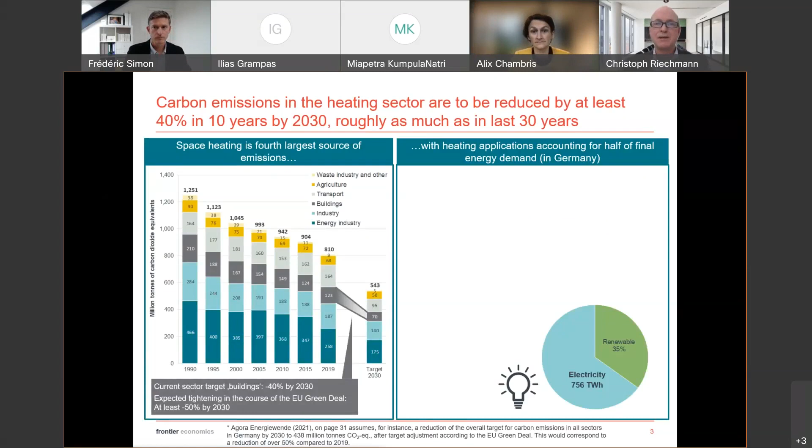An important point to note is that while we've made excellent progress, for example in the electricity sector, where about a third now stems from renewable sources, we also need to address the transport sector and particularly the heat sector. As Frédéric has pointed out, we need to advance quite significantly in the heat sector to achieve our renewables target also for heat.

In terms of energy consumption, out of the sectors we have in mind, the heat sector is the one really consuming the most energy of all. And it's one which does not have the same level of renewable penetration yet as we, for example, have in the electricity sector.

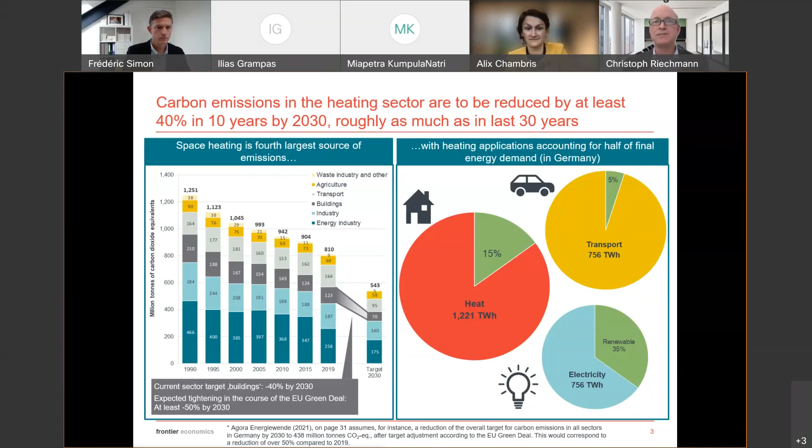The challenge we have in that sector is that we're dealing with a very heterogeneous housing stock, which means there's no one-size-fits-all technical solution to achieve this move to using more renewable energies.

Just to illustrate the setup we're dealing with: in a lot of cases, the housing stock is not new. It's not easily converted, for example, to apply electric heat pumps. The housing stock in Germany, for instance, is two-thirds made up of buildings constructed before the first energy efficiency regulation came into force in 1977.

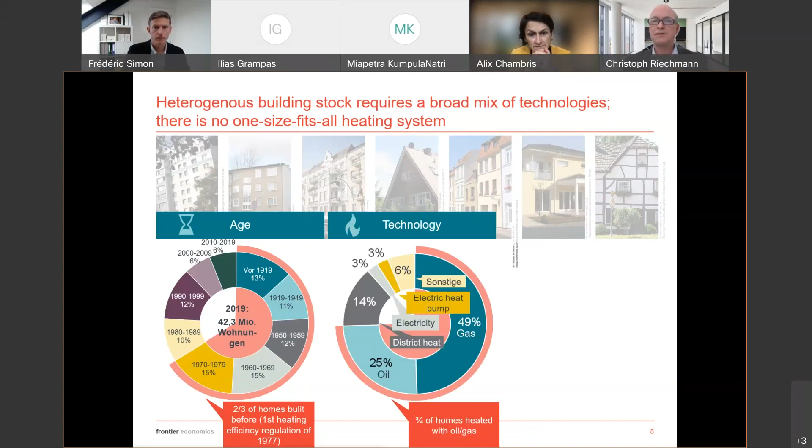Equally, in terms of technology, we have the huge challenge that currently three-quarters or more of the housing stock is heated with fossil fuels, mainly gas and oil.

And finally, the renovation status of these dwellings is also fairly limited. We'd say only about 1 in 8 of the dwellings are in an ideal state, for example, to be equipped with electric heat pumps. The remainder is only part renovated or not renovated at all.

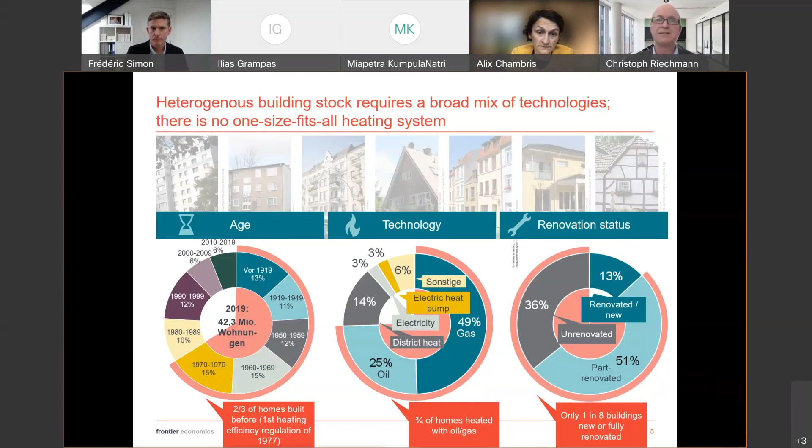What we need is a solution that fits for everyone, not just for new buildings with very high insulation standards. And the key challenge we need to address is to be able to meet peak winter demand. I'll try to illustrate what that means with a little quantitative analysis we've undertaken.

In the first instance, it's worthwhile looking at what the typical demand pattern in the heating sector is. We're estimating this based on the seasonal profile of gas consumption, which is a very good indicator of the seasonality of energy demand for heating. You see this very pronounced profile of peaks in the winter, and these peaks are directly related to the outside temperatures.

If we regroup this data in a slightly different way and relate the level of demand on the left-hand axis to temperatures, you see there's a very clear relationship between outside temperatures and the level of energy demand for heating, where demand is relatively low up to an outside temperature of about 18 degrees centigrade, and then rises very rapidly for colder temperatures.

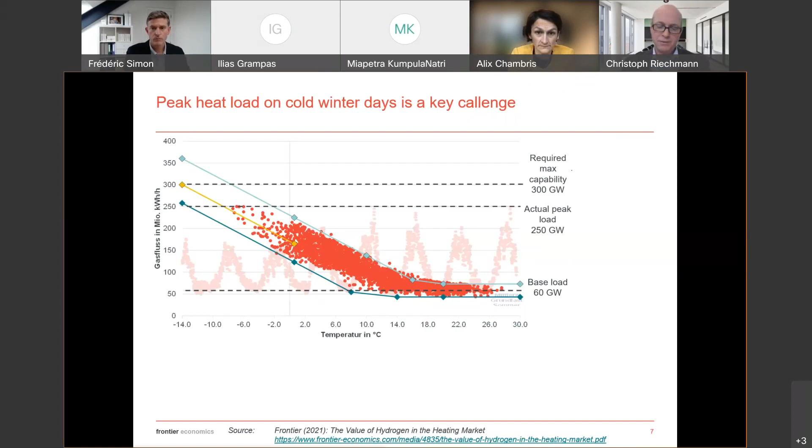It rises quite significantly, especially if we look at very cold days, indicated maybe by days with an outside temperature of minus 5 degrees. That means that in this instance for Germany, we need to be capable of supplying a peak winter demand for heating purposes of 230 gigawatts.

This is the demand we currently serve through gas alone. Add to that about 100 gigawatts of capacity currently served from oil heating. Together this adds up to 330 gigawatts.

If we were to convert all of this heating, for example, to renewable electricity using heat pumps, we would have an additional capacity requirement in terms of electricity of 86 to 124 gigawatts. Compare this to the existing scale of the electric system in Germany, which has a peak load of about 80 gigawatts.

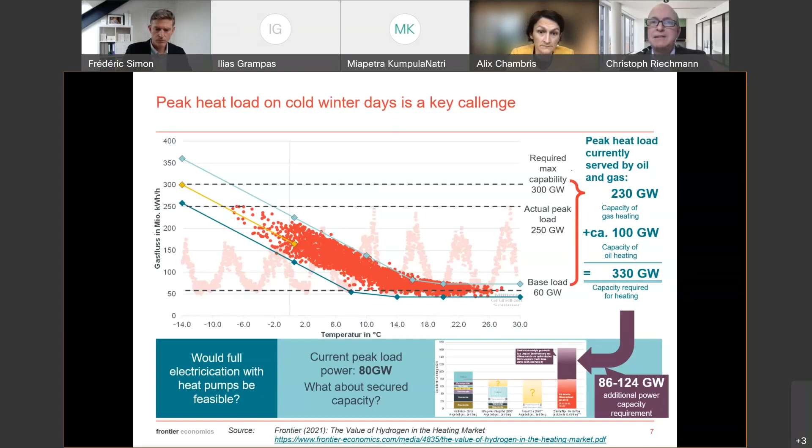So what we're saying is, to convert all of that peak winter demand to renewable electricity, we would need to more than double the electrical system in Germany, and we'd find similar values for other member states—and that in a situation where we're actually phasing out a lot of the conventional sources of electricity and gradually replacing them with renewables.

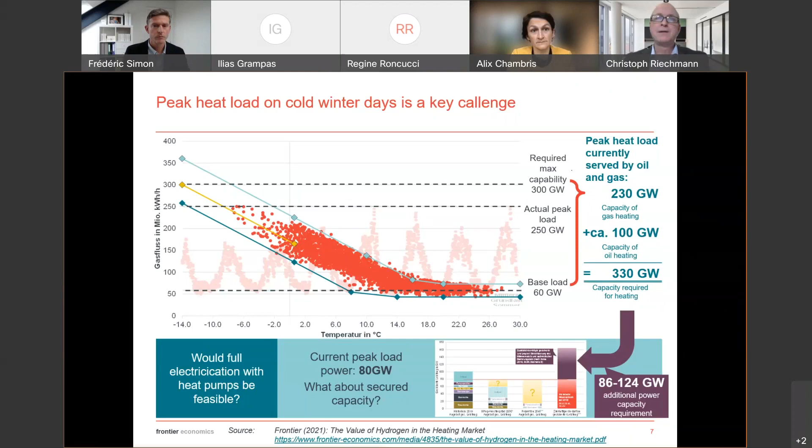So I think this alone gives us an indication and a picture of the challenges that we have ahead of us. Now, you will know that electric heat pumps are a sensible solution in order to relatively efficiently deal with energy demand, especially in winter.

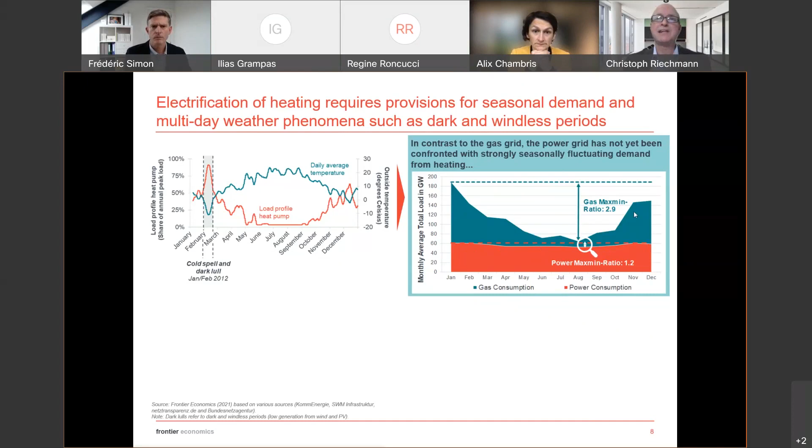And so if we contrast that with the current use of energy and electricity, which we've depicted here through the year with the red area, and add on top the heating demand that we would get on top of the traditional electricity demand, you immediately see the challenge that we significantly need to scale up our electric system to be able to meet all heat demand.

The challenge is that the electricity we propose to use, renewable electricity, does not actually meet this demand profile that we need to serve in the heat market.

Actually, the electricity supply profile from photovoltaics is somewhat inversely related. We produce a lot when we need relatively little for heating, and we produce almost nothing when the heating demand is greatest. And equally, wind, the other renewable electricity source, also does not ideally comply with the need for winter demand.

So actually what we need to do is produce and secure a lot of energy in those times when we have a lot of renewable available, and we need to store that energy to release it in those times when the peak winter demand is at its highest.

But the challenge is that the way in which we currently store energy, the facilities that we currently have for storing energy, is significantly in the form of gas storages, and only to a tiny extent in the form of electrical storage. So we have a huge challenge of storing renewable energy that we produce through the year, to release it in the winter peak.

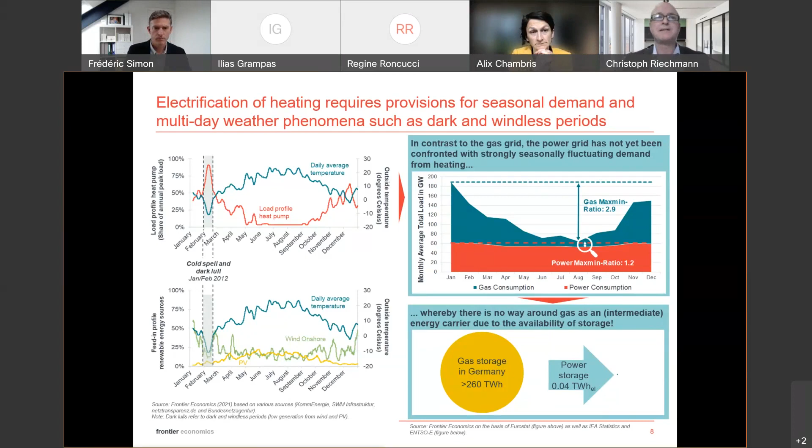Now, just to contrast and explain that picture again, we have the option of entirely supplying our heating demand from renewable energy sources in the form of electricity. But what we need in the middle, for purposes of winter storage, is to convert a significant amount of that electrical energy into molecules, for example hydrogen, and store it for the winter. And if we're in the electrical chain, we need to convert it back to electricity to then supply our homes.

Alternatively, or complementing this system, we can have a gas-based system, which also starts with renewable electricity, converts that renewable electricity early in the process into gas, hydrogen, uses pipeline systems to store it for winter, and then supplies this gas to heat our homes.

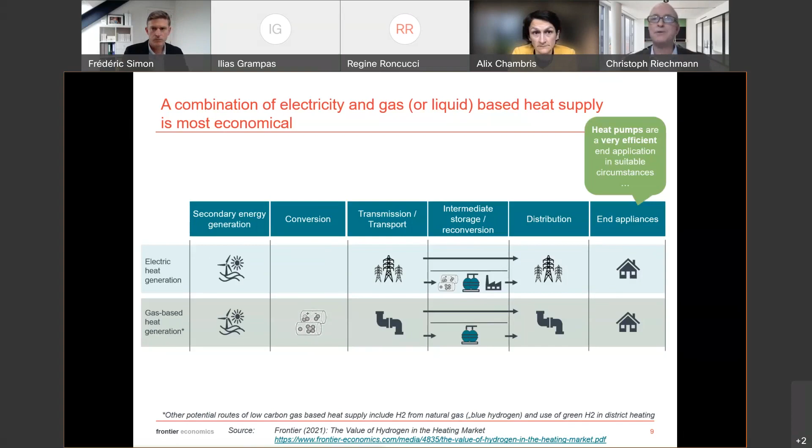Now, the electrical chain has the advantage that we can use electrical heat pumps, which on their own, when the electricity is produced at the same time as we consume heat, have very attractive properties in terms of energy efficiency. But as soon as we need to meet this seasonal pattern of demand, we're reliant on an intermediate storage in the form of molecules.

Where we have not only the conversion losses to produce hydrogen, for example, but also conversion losses to convert it back into electricity. And we also need to significantly expand our electricity infrastructure, as I indicated on a previous slide.

In contrast to that, complementing this system with gas-based heat generation, we have the opportunity to continue to use existing gas infrastructure and existing end applications in our homes, to form a system which mixes and blends electricity and gas as forms of end energy in our heating systems.

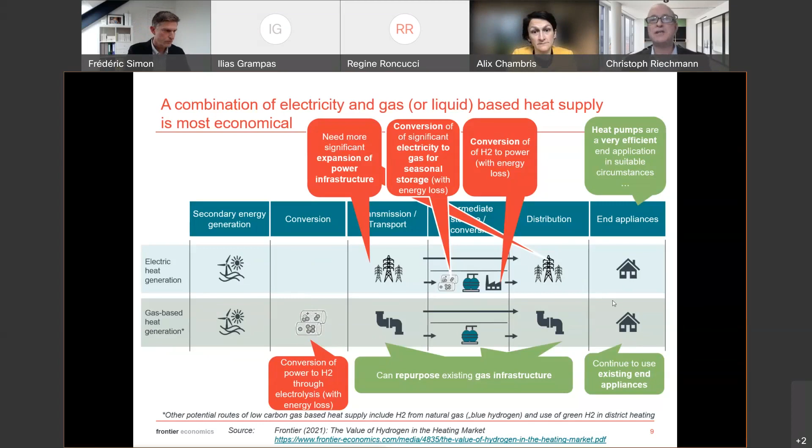And so, therefore, what we have found in our analysis and various studies is that what we really need is a mix of technologies for the transition of the heating sector, in which hydrogen can make an important contribution. So we really see 5 pillars and 5 key aspects that we need to bear in mind. We need to be aware of the heterogeneity of the heating systems.

We need to understand that we're not only dealing with new and well-insulated buildings. Supplementing the system by low-carbon gases, including hydrogen, can make a significant contribution, especially to deal with the seasonality in heat demand. This approach will also help us save on infrastructure, because we have the opportunity to use and repurpose existing gas infrastructure.

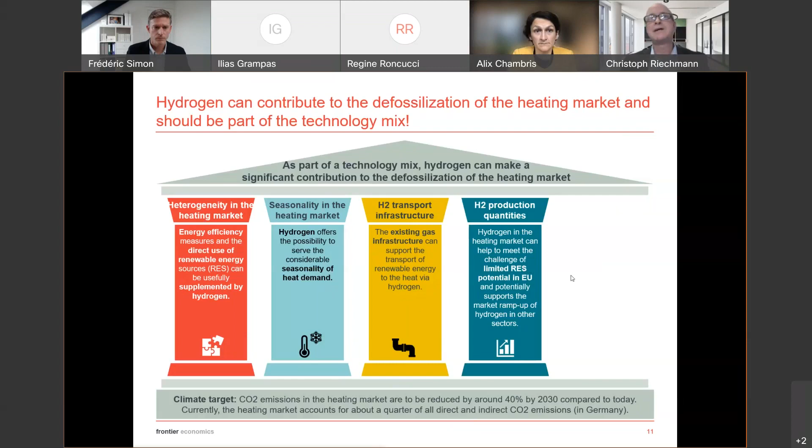This model also helps us limit the requirement to build up renewable generation capacity, when we know this is a space-intensive activity, and when there's increasing competition for space for renewable energies, agriculture, and other purposes. Finally, this approach allows us to limit the overall system cost we will incur in defossilizing the heating sector. So I thank you for your attention for this quick run through, and I'm looking forward to our discussion later on.

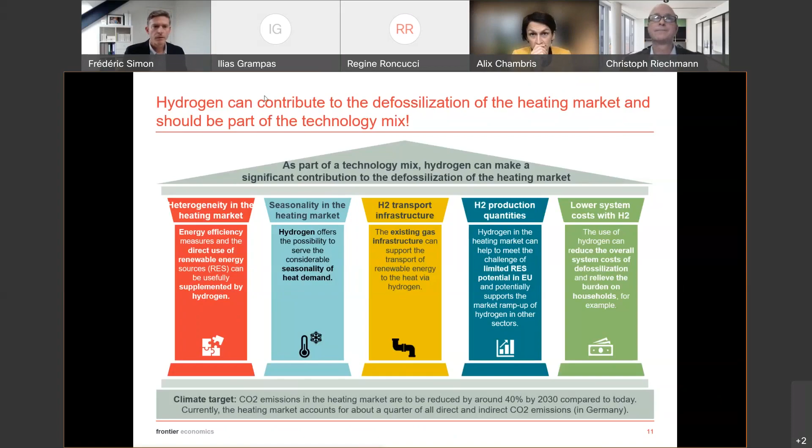As Ms. Spyraki already said, there are 2 main drivers to increase the share of renewables in buildings. First is to reduce energy demand in buildings, and second, to replace fossil fuels by renewable technologies. Let me start with the first one, energy demand reduction, which will also help a lot towards reducing energy bills, which is very important at this stage.

So here we mainly talk about existing buildings. Mr. Riechmann showed an overview of different building periods in the age of existing buildings. But over 85% of the building stock that we have now will still be there in 2050. So that's the main challenge. We need at least a doubling of the rate of renovation until 2030, and we need deeper renovations to reduce energy demand and reduce emissions.

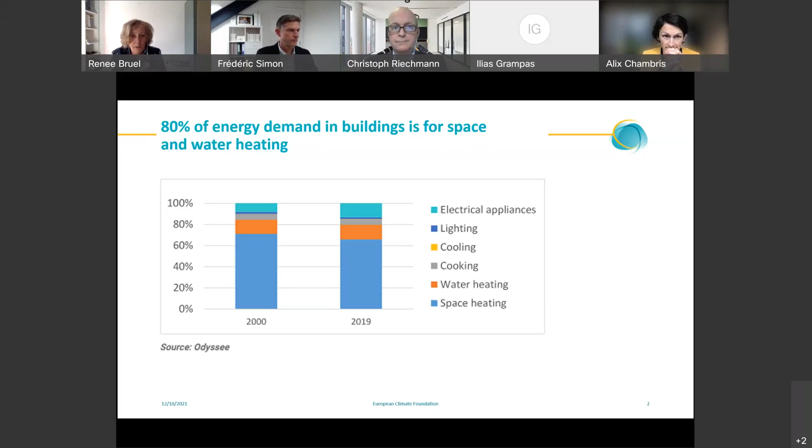Before I talk about how to achieve the 49% renewables in buildings, I'd like to take a moment to consider what is renewable energy. Because at the moment, 80% of what is officially considered renewable energy for heating, this 22%, is biomass. And that ranges from the burning of wood pellets in highly efficient stoves to burning tree logs indoors.

I think we're all familiar with the potential problems of using biomass for heating at large scale. It can cause deforestation, loss of biodiversity, air quality and health problems, and it doesn't lead to greenhouse gas emission reduction. It only does so in calculations.

So how can we ensure that a target of 49% renewable heating does not lead to a dash for unsustainable biomass? I'm not saying that all biomass is unsustainable, but there is a risk. According to this recent paper from the Regulatory Assistance Project, the Renewable Energy Directive needs, at a very minimum, to put a cap on the use of biomass overall, but also for heating, because it doesn't make sense to solve one problem by creating a new one.

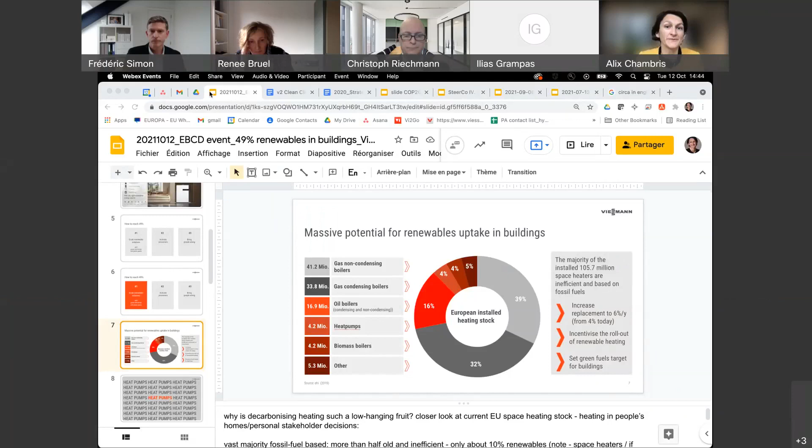Thank you. So I'm about to share my screen. If I can, one second.

So I'd like to start with a quote from our CEO, Maximilian Viessmann. For those who don't know Viessmann very well, we're a family-owned company in heating and cooling. We also work on ventilation, by the way. And Max Viessmann is a 4th generation CEO. Here you see, maybe I can move this, that he says we do sit at a crossroad.

We have all heard about the IPCC report published in July. We are clearly in a state of emergency, yet at Viessmann, and I'm sure we share these views with Renee Bruel and most of the panelists, that we know there is ample evidence that net zero is achievable and far less costly than the cost of non-action. Climate technologies are available, new ones are coming. Speed and scale is now what matters.

So when we speak about speed and scale, we are speaking for the debate of today on how to move from a 10% share of renewable energy in buildings to 49% in less than 10 years. And to come back to Max Viessmann's quote, we know that the solutions do exist to meet the 49% target. We can reach it on the product side via heat pumps, via hybrid systems, biomass systems.

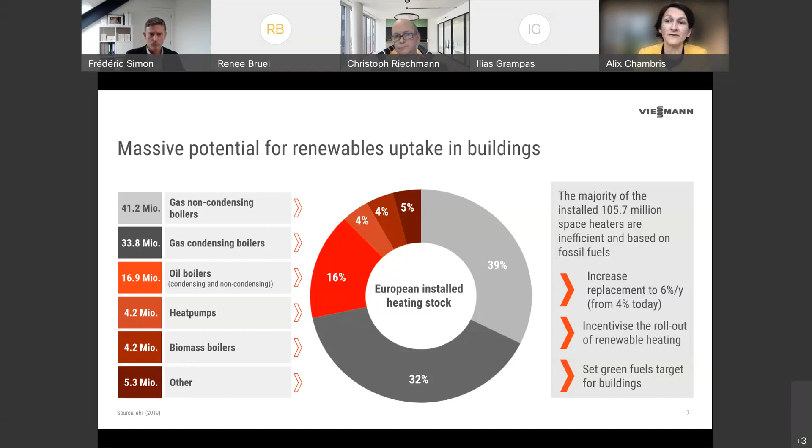The next lever on the acceleration side is heat pumps. We all know that we will achieve 49% if we accelerate and scale the rollout of heat pumps. Our goal at Viessmann is to ensure that the heat pumps do meet their promises.

We are in direct contact with installers and end users. We hear what they are saying, and a successful heat pump ramp up builds on five pillars. One is we have to quickly shift towards natural refrigerants, which have a very low or zero global warming potential. We have to make sure that they are low noise, which is a major problem for end users.

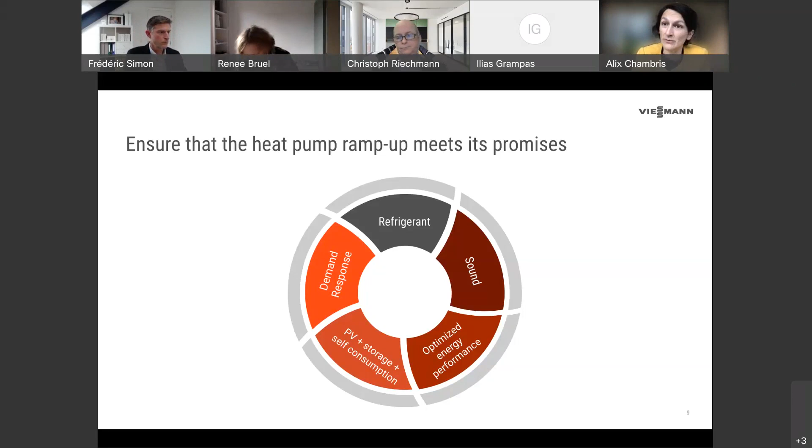We have to optimize the energy performance and make sure that they actually deliver the low energy bill that they promise. We are working on that, on the testing method, with the German government, to optimize this energy performance. We have to work on combining heat pumps with PV and storage self-consumption solutions, and leverage the potential of heat pumps for intraday demand response.

The next issue for achieving the 49% target is to leverage the potential of hydrogen for the hard-to-abate building stock. I understand there is concern about the availability of hydrogen. Nevertheless, we clearly know that the building stock is a hard-to-abate sector. Our colleagues from Frontier Economics have demonstrated the issues: the heterogeneity of the building stock, the issue of affordability, the energy system costs.

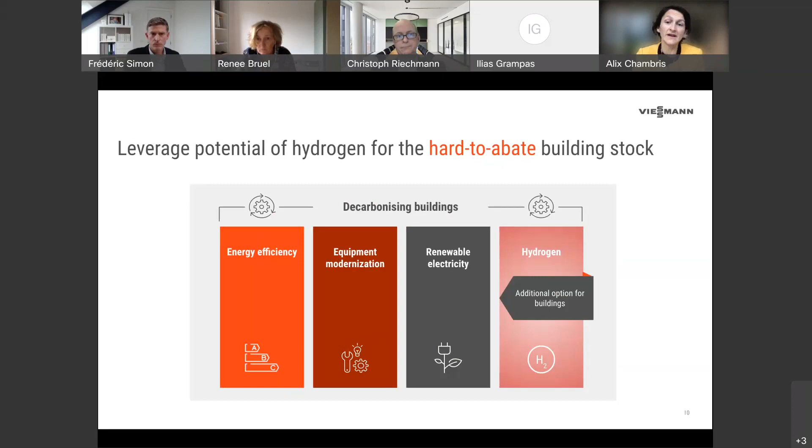We believe hydrogen will be another pillar and solution to increase the renewable share in buildings. On the manufacturer side, the priority is to synchronize the decarbonization of gas with the end-use appliance, meaning to make sure they are able to function with a rising share of hydrogen, and by doing that we avoid the lock-in of fossil fuels.

Here's an overview of what we can do today. The entire installed stock of space heating today can already run with 100% biomethane, with no extra investment, and they can already run with a blending of up to 10% hydrogen. With Viessmann and the entire heating sector, we are working to ramp up the placement on the market of new installations so that they are hydrogen ready.

We call for the adoption of a mandatory eco-design target to make sure all new space heaters are able to run with a blend of up to 20% hydrogen, and to adopt a mandatory requirement that they are 100% ready. By that we mean they are supplied and conceptualized so you can change the burning chamber to make them suitable for a 100% hydrogen supply.

At Viessmann, we know the extra cost would be less than 200 euros if needed in those hydrogen valleys that choose to run on 100% hydrogen. What we are saying is it's a no regret move to shift space heating to hydrogen readiness, because it comes at close to no cost to the end users. You would invest 200 euros for the 100% kit only in those localities or regions where it's needed, and by doing that you are ready for whatever decarbonization scenario the countries or localities choose to run.

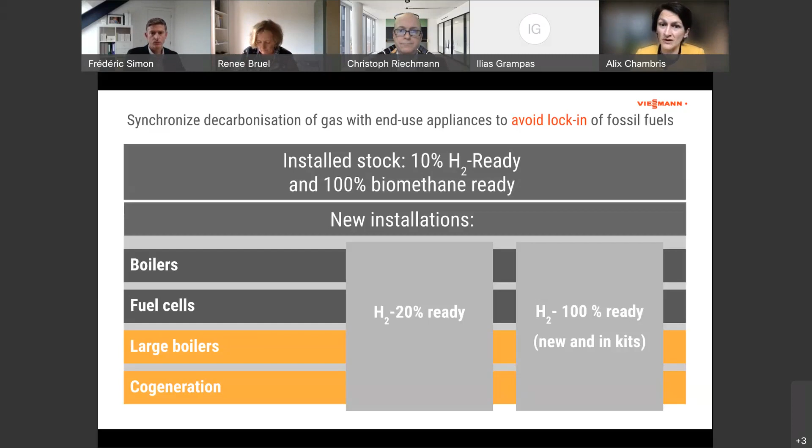The second pillar is to activate prosumers. We believe it's high time to speak far more about prosumers. We estimate that close to 50% of people at EU level could become active prosumers. It's a no regret move to move towards active buildings. It can maximize system efficiency and reduces the need to fall back on fossil energy during peak times.

It reduces the energy cost for occupants if we have the right energy system and pricing structure, and it enables direct participation of people in the energy transition, which we believe is critical to increase the buy-in to the energy transition.

What we need to do is make distributed prosumer resources more attractive and reward demand-side flexibility. Here, the electricity market design legislation made some significant progress. It's high time to implement it and accelerate the profitability of demand-side flexibility.

Then we need a holistic approach when we work on the EPBD, and also very important, we need to increase and train the current installer workforce to make sure they are able to install and manage self-consumption models.

A final point I would like to raise is that the 49% is not just about technologies, it's not just about policies, it's about people. We need to bring people along.

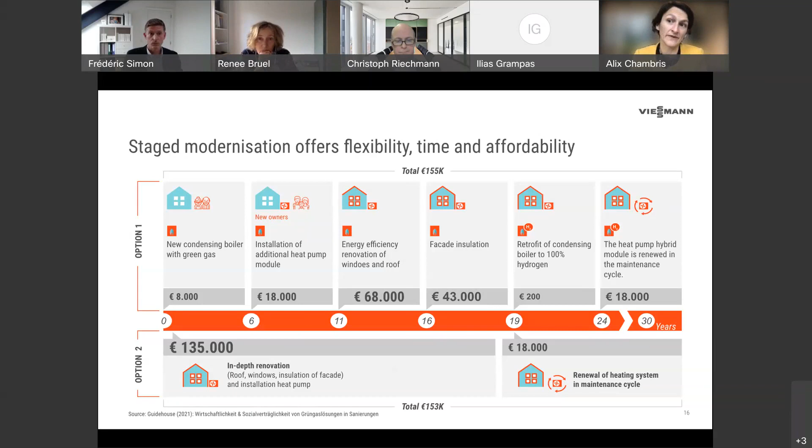Another study adds information on the affordability of green gas and hydrogen. Renee shared a study which showed that the energy cost of heat pumps are far lower compared to hydrogen. We do not believe in this type of studies. Probably the study that René showed did not take into account the whole energy system cost, because at the end of the day, the oversized electricity system will have to be paid by the end user. So even if you count the cost of the end user, you need to factor in energy system costs, as highlighted by Frontier Economics.

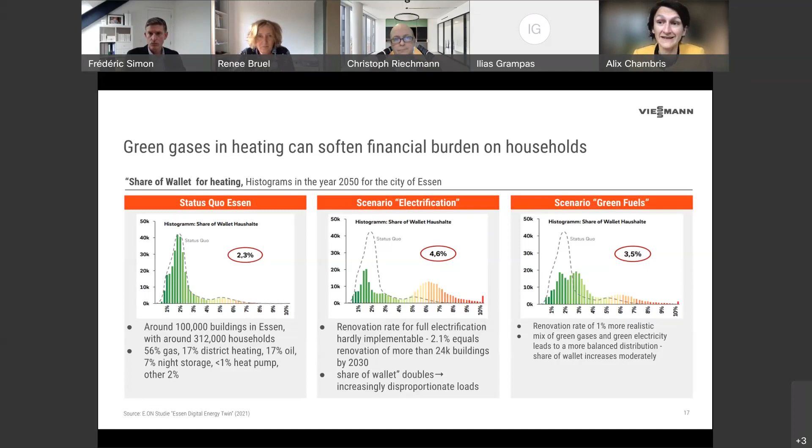So again, I understand this is a new topic. This issue of peak load, seasonality of heating demand, is a new topic. It deserves far more attention, far more research. That's why I'm very grateful for the work led by Frontier Economics. My call to every policymaker is to keep this investigation and think far more about this energy system perspective.

So to conclude with these three pillars, we believe that the 49% target is achievable, and I'm looking forward to work with policymakers to make that happen. Thank you very much.

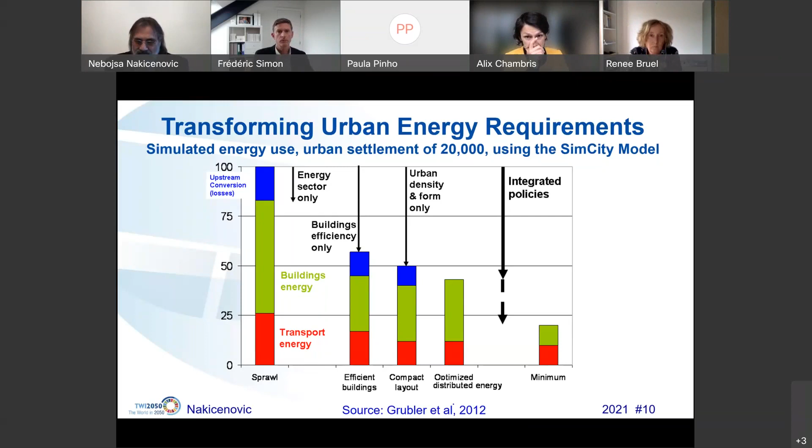Our third and final recommendation to achieve this high ambition level in buildings and throughout the energy system is that we need a coordinated combination of policies, measures, and instruments, including carbon pricing as a driving force to shape an effective, consistent, and just regulatory system. So coordination and combination of regulatory measures is central.

Second, to make a clear political commitment toward high carbon prices. And I mentioned the dilemma, how to achieve that without leaving anybody behind. But this is necessary because of the climate and other social and environmental costs of using fossil energy.

And last is to support international efforts, perhaps decarbonization clubs, where Europe could, together with other allies, nudge the rest of the world towards sustainable development.

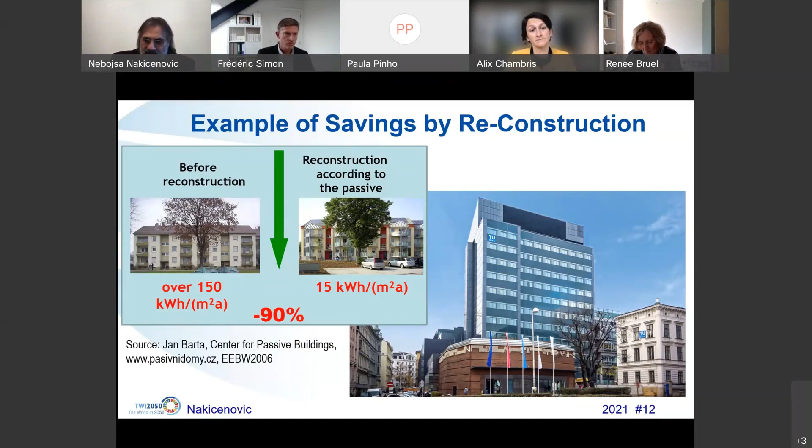Can I have the next slide? Yes, this is directly related to the decarbonization of the building sector.

And I cannot overemphasize the importance of viewing the integrated perspective on systems.

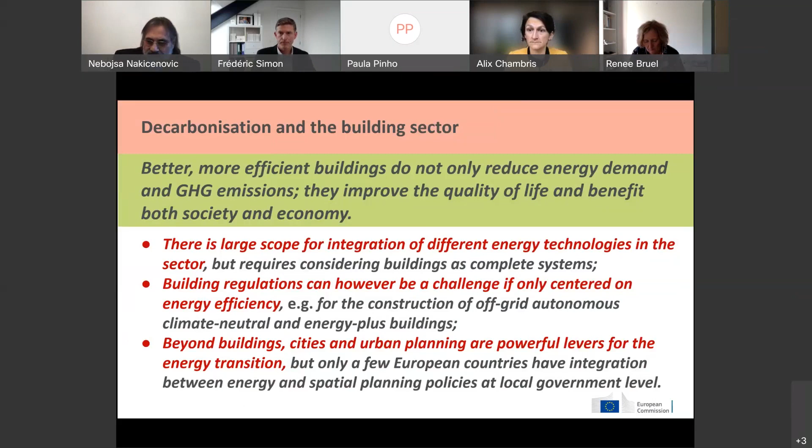So I would like to stop here. Next slide just gives my email address in case there are some questions. I would like to thank you very much for your attention.